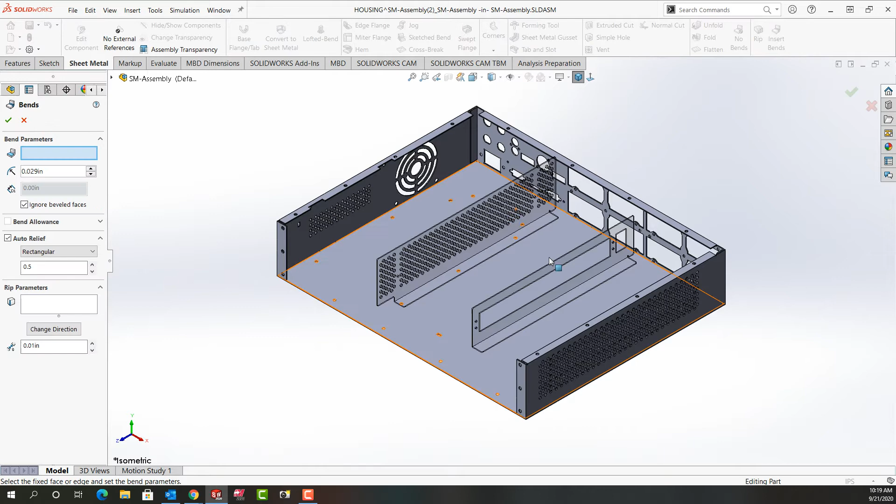Notice the other parts are see-through because I'm editing this part. I'll select this face as my fixed face, tell it the internal bend radius is 10 thou, and then accept that selection.

We'll give it a minute to collect all the bends. It's going to let me know that auto relief cuts were made for one or more bends. That's great, I'm going to say OK.

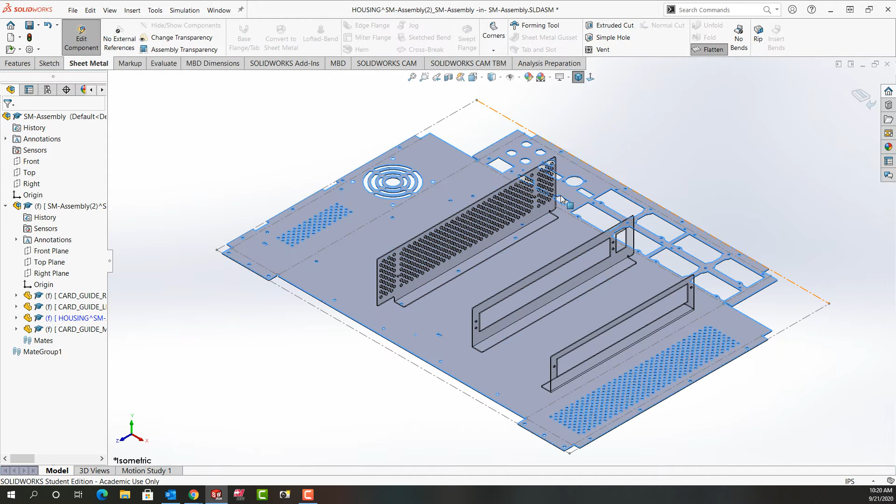I'm going to just flatten it out to see how it looks. We can see the auto relief cuts in the corner, especially if we zoom in. I'm going to fold it back up, and I'm going to stop editing this part.

I'm going to repeat the procedure for this part. I'll select it, edit the part, tell it to insert bends, select my fixed face, accept the settings, and say OK.

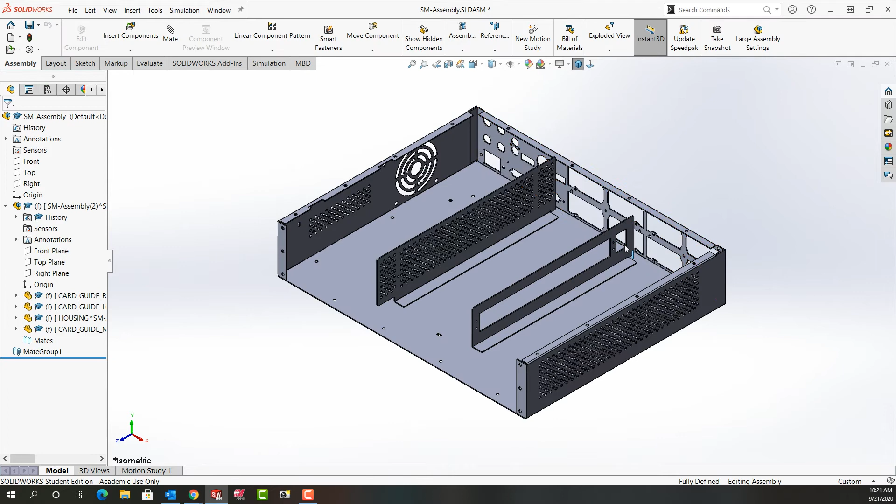I'm going to do that one more time for each of the remaining two components. I'll stop editing this part, select this part, edit it, insert the bends, select my fixed face, leave all the remaining defaults, and say OK.

Stop editing this part, I'll rotate around and select this part. I'll edit the part, insert my bends, select my fixed face, and I'll say OK.

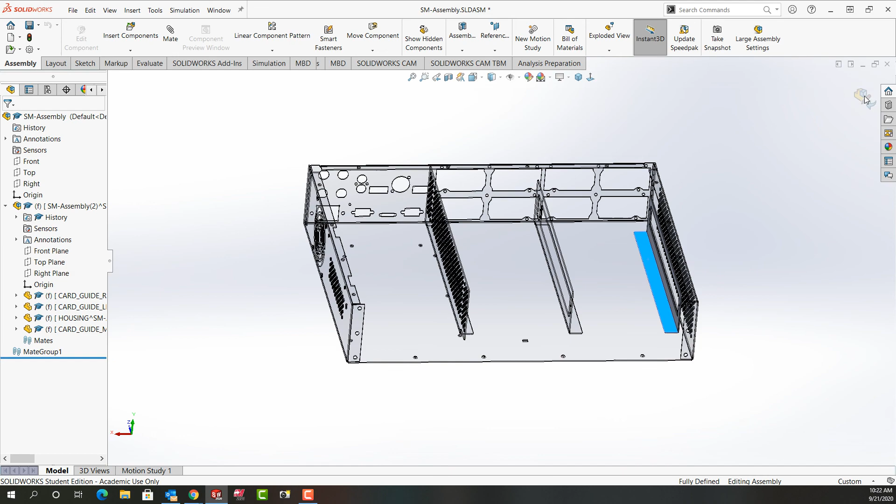Once again, I'll stop editing that part, I'll look at it isometrically, and I'll save.